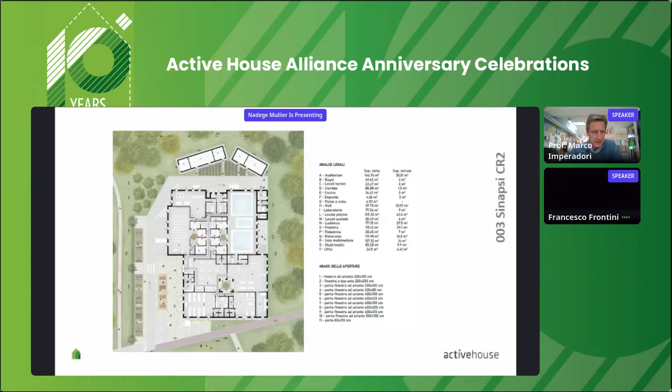We can see the next slide, for example. Thanks for what Francesco underlined, I'm very thankful for this comment. You see the energy strategy is a very hyper-insulated building with a green roof, and next, the recovery of heat and recovery of water.

You can see what Francesco was mentioning - children can play and look outside, so they have a protected environment inside, very cared for, with vision and contact with this park, because it is in the middle of a park in Cremona. The project has been approved and financed by the Region of Lombardy Foundation Cariplo. Altogether we are very proud at Active House Mantra, and they were so happy to have been shortlisted. I've seen on their Instagram, Occhi Azzurri Onlus is the NGO that supports this activity.

So thank you very much. This is the commendation diploma. You can see Sinapsi CR2 is signed by Lone and by myself as president of the jury.

Thank you, Francesco, for this comment. Let's go to the second commendation for the clever strategies and a very precise radar given to a single family house. I ask Alexander Kucheravy to comment on the commendation for the project, the villa on the hillside, in Ukraine. So would you say something about why we as a jury supported this project?

Please, go on. I'm not surprised. I'd like to add that I know the architect of this house very well, because she participated in my first education course in Ukraine in August 2018. So she came a really long way, and I know the company where she works well.

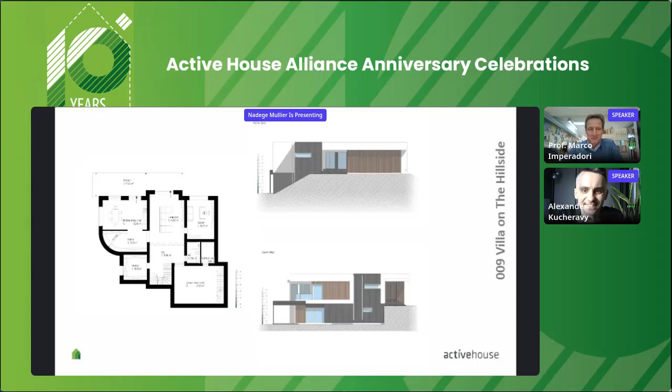But I'm really happy to see that an academy, a school, and the local agency - your one, Gunther, and so on - are doing a big amount of work in your own country and also spreading around the world, being very active with real professionals. We do our job from the academic side with new generations, but new generations are also young architects who didn't have any opportunity in the university.

Still in Italy, not so many are pushing about climate change and about this necessity, as you were mentioning before, sustainism. So if we want an ism, activism should be our ism, because we should be active in architectural design - this is architecture.

And what is the beauty of this project, Villa on the Hillside, like others, is that, as you can see, they are totally different one from each other, integrating architecture but also other purposes. So thank you, Alexander, for this comment.

This is the radar, very, very solid. Let's hope that this radar will be confirmed. And this is the diploma, which will be given to the Villa on the Hillside as a commendation. Let's go to the next one.

The commendation - we decided to give some students commendations because, as I've told you, I teach about Active House in my classes, and my students develop this for their graduation or for the project they have submitted. So we decided to give two student commendations.

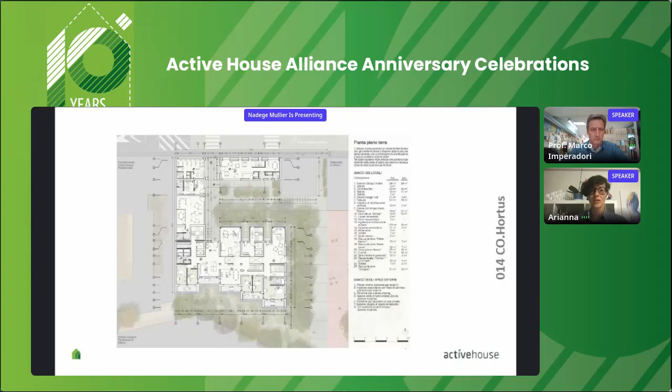Yeah, the jury particularly liked not only the design, which I think is very pleasant, but also the detail of this project, which clearly is a student project. All the jury were very impressed by the level of detail, and also the social engagement of the project itself, which is an important part of Active House as well. So it's not just about energy, as we were saying at the beginning. That was the main reason why.

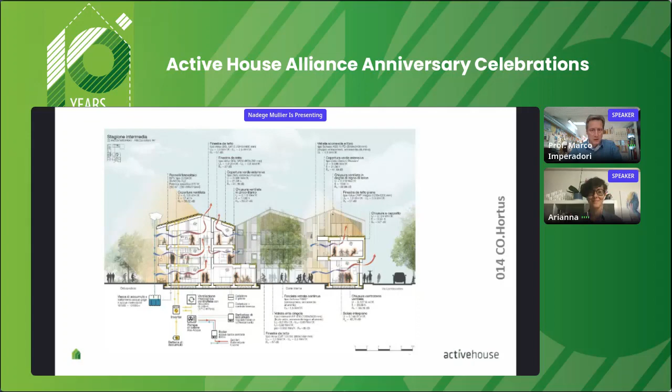I think it's very important what you say, because here is a mixed use by students, old people, etc., in a peripheral part of the city, close to our university, to my lab, where the city is transforming. So it's very important that our students get ready to understand Active House principles, making it buildable, ready to join companies soon - they are young students who will bring these ideas inside companies as a possibility. Because if you don't even have the possibility and you don't know the radar, how can you propose it? So I think they are our best ambassadors in the offices soon.

Thank you very much, Arianna. I think we have a final image.

Or this was interior. You can see the next one, this is the back, which is more urban, close to existing buildings. This is the radar, quite impactful. Of course it is a project, so they could exploit as much as possible. Here you can see the diploma CO.Hortus project as a commendation.

Now let's go to another student commendation. It was a very different exercise, so we decided at the end to give two commendations to students. This is a beautiful exercise of lightness on Ischia Island. A floating active house can be for sure a possibility in the future.

In this case I have to explain a little bit. The exercise was to transform the VELUX Lab where I am, so you see the skylight is exactly the same, into something else around the world, in a mountain, in a city, or floating. These four students, Elissa, Kamalia, Sharifi Kakpur, and Marelli Garbusera, decided to make a floating house in wood technology, because the idea is to keep the shape of VELUX Lab but totally change the skins, the layers, the technology. So they decided for wood technology.

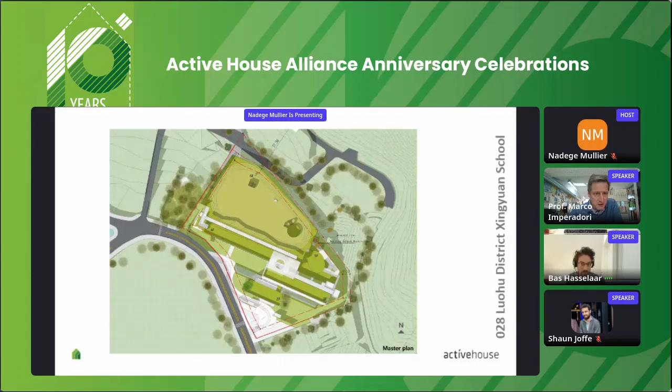Yes, we can see next pictures with all this green roof, etc. So there were some points to be worked on. You see the impact on the land section, the natural light, and here the sun shading, because the sun is very strong at the tropics, with heavy rain.

So the whole building seems to accomplish many things, but we can see at the radar there was still a possibility for improvement in some parts of it, especially the deepness of some parts of the building. Maybe it would ask for zenithal light, natural ventilation in the middle season to winter, because using natural ventilation in a humid climate is very difficult. But I really see a lot of potential. So thank you very much.

And the final diploma of Luohu District School, we can see. Yeah, and we do have a video for this. Okay, show it.

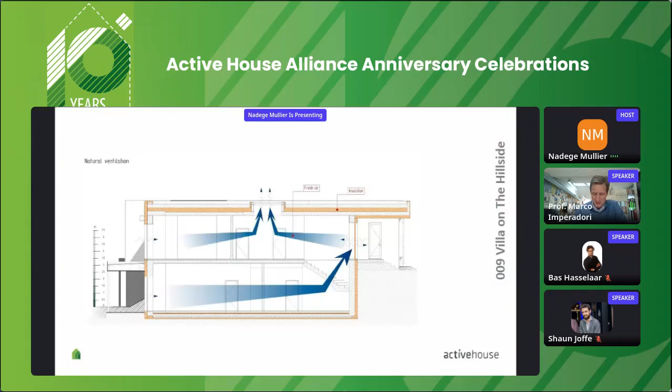Okay, you can go on, Nadege, because this is the first slide. Sorry, go on quickly. No problem. I am introducing this by saying that we had several projects, beautiful, from all around the world. I was also impressed that the project came from Thailand. Fantastic, we have now really sprawled all around.

I can see a lot of activity also from Japan in the Active House site, etc. So people are really taking this up. And the fact that it's a free platform, of course, when it gets to a label, you need to submit it to the local agencies to be controlled, and you have to pay a service. But in general, to leave the tool free for everybody is important to gain pace.

And also it is proven by studies, by GXM for example, very well done, that the Active House radar sits in the middle balance of all the other systems, LEED, BREEAM, Casa Clima, whatever you want to calculate. With the radar, you sit exactly in balance in the middle. So as a design tool, very important, and then as a label, more and more solid.

And we were very severe in the fact that some people submitted with no radar, etc. So we need really to accomplish the regulation. So the jury was very severe, I have to say. Next, the commendation is for a very elegant project that shows how a nice design can achieve very good performance also with a low budget in an extreme climate. And I would like to call again Arianna Brambilla to commend the commendation given to the Warm Nest project of Zeuge.

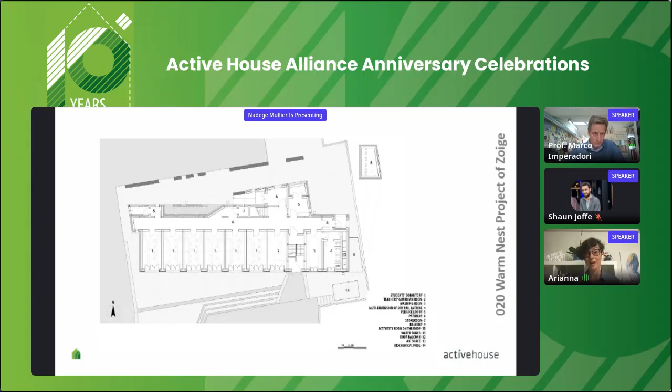What did the jury, why were you sustaining this project, and the jury followed you, please. Again, it's not just about the architectural outcome, which is clearly very pleasant also in this case, but it's about the sign that we wanted to give. And this is a very good example of how Active House can actually be used as a label, not only for warm climates or mild climates where probably it's much easier to build, but also for extreme climates, in this case very cold, and we have seen also some other cases very tropical.

So this is really a good sign that we can actually build beautifully and sustainably also in extreme climates. Exactly, and a beautiful place, because architecture is for everybody. This will raise up again, it's an educational build, a common purpose building. And also the fact that, as Günther Gantioler was showing before, all these analyses on daylight for all around the world, and not only in the middle temperate climate, helps a lot to enhance the mission all around the world.

Every nation is different. I remember your PhD work, Arianna, was exactly about that - how to target the tool in a different climatic situation. We ended up with a Springer brief book for that, and you have a very strong chapter in it. I think the research has helped and is going on, as we've seen from other sides of the Alliance. Thank you very much and many compliments to this project.

Let's go on. We see the radar. The radar has a weak point, we can see it now. Definitely you can see it was declared, so we appreciated the honesty to declare and not make fake radars, because we don't have time to go into detail. But of course the other part of the radar is very strong. Next,

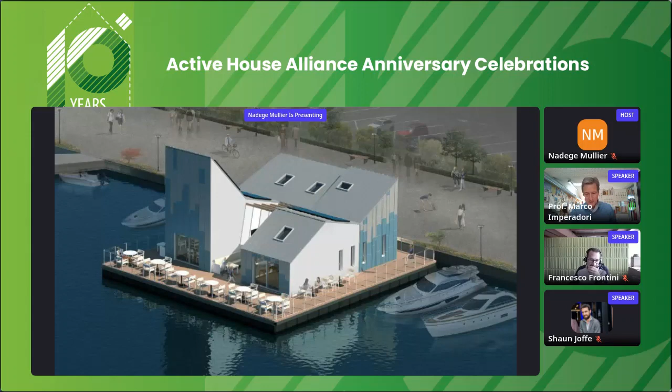So let's go for the next, the category overall best. I think we can make it in 20 minutes as foreseen. The 10-year overall best has been a very tough selection, because we have had so many beautiful entries, and already looking at the best selected in the previous juries, we have worked in respect of the juries before. But at the very end, we need to select some commendations, and then there is a best.

So let's go for the first commendation, for a fine and single example of a single-family house, well designed, rich in positive performance and comfort. The winner is the Family House in Dragomelj.

We can see it. I would like to ask Lone to tell us something, because she's visited this building, and this was a commendation by the president. So I was the one to select this building, because I think we are opening up the discussion around big buildings, but at least we started with single family houses, model homes, and I think this building has a lot of quality. So please, Lone, tell us.

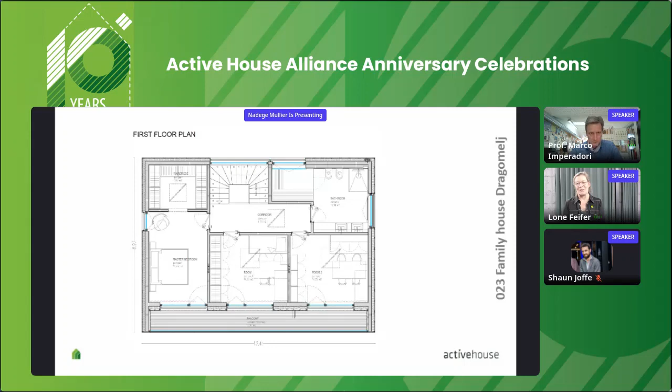It is a very big professional house builder who is working also in Austria and Slovenia, visible with wood technologies. Exactly, very good, as I have also seen in some other places in this part of Europe, where I think they have been working with sustainable buildings for several decades, also like Günther and like yourself. Up here in the north, we have only just started in the last 15 years.

But if you don't want, you don't have to show it. You have a flat roof and the staircase creates a chimney effect.

This is very clever in the sense that every architecture is free. Sorry to interrupt you. It's okay, I'm used to it, Marco.

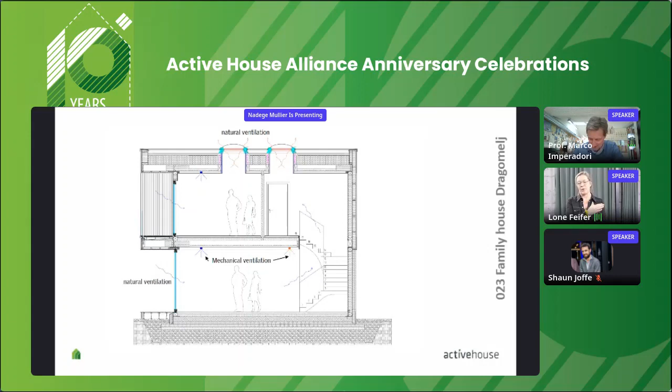It's a very good example, and I think also telling a story in the sense that the house builder has elaborated a lot doing passive houses and taking up the challenge, wanting to be at the front and leading visibly the sustainable developments. I cannot speak on his behalf, but I think what he expressed is he would like to take the next step into human-centric sustainable architecture.

And then he went on to do an active house. And that is how we see active house as the next generation, or following passive house.

And as you can see, the roof, I recognize it, is an absorbing sound roof, is Cleaneo by Knauf, which is the same that I have above my head here.

Because the acoustics performance is also very important, so how do we really have an environment that touches all our senses. We are speaking very much about the senses, the sensors that can allow us to understand the climate inside and outside, but also our senses, our feeling. This is very important, to care for all of them.

Great, it's a great project. So thank you very much, Lone, and I'm happy to have sustained it and pushed it for this commendation, the president's commendation. This is the radar, very important, very cared for, and this is the diploma, family Dragomelj.

Let's go to the next commendation, for a very advanced energetic strategy with beautiful plastic aesthetic output. And for this, the commendation goes to CIS, Copenhagen International School.

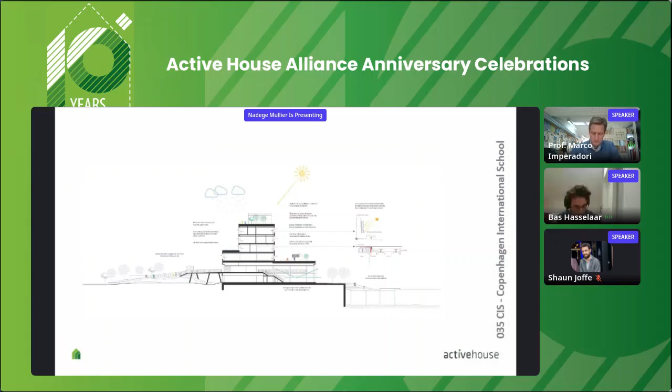But actually, it's relatively similar to the other Chinese school project that has won an award today. Very clever use of ventilation and daylight access.

The use of material also indoors, aimed at children, so that the young generation can get education in a proper, healthy environment, which supports their learning abilities.

Very much impressed by the building itself and how they achieved it at such a location. Definitely, and as we can see, the facade is in BIPV, building integrated photovoltaics, where the PV becomes also aesthetically much better than before.

This is also interesting, because I always underline that a sustainable building cannot be aesthetically unsustainable. So I am very much against any sustainable energy device that is above the architecture, in the facade or in the roof, that doesn't allow us to be happy for the proportion, for the aesthetics.

I think that everything should go together, as it has always been in architecture all over the years, all over the centuries. So this is the radar, very impactful. It was awarded in the past, and it has a commendation for this time.

So next, the commendation is for a simple house refurbishment. There is an error there, with active house principles, showing how active house can be a profiting strategy in harmony with the new European Bauhaus and Green New Deal targets.